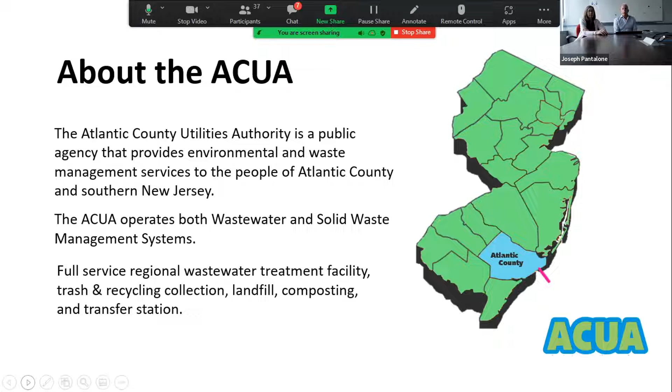ACUA operates a wastewater division and a solid waste division. We are actually filming this video from our headquarters, which is where our landfill and composting and recycling center transfer station are located.

As Sarah mentioned, that's our service demographic. We serve about 275,000 people, which is over 100,000 households and over close to 550 square miles.

Our facility is rated at 40 million gallons a day. It's considered an activated sludge treatment plant. We operate 20 regional pumping stations. In addition to that, we have shared service relationships with some of the communities that we serve. So our collection system entity services over 120 pumping stations a week. That's quite a task for about 10 individuals on that team.

We service 14 member municipalities, of which Atlantic City is our largest contributor. As Atlantic City goes, so does the rest of the county, and that's been a roller coaster ride as you follow the news and everything else, particularly after Sandy and with the competition of casino gaming across the country, and then most recently COVID. These are some of the pitfalls that Atlantic City has faced, not only Atlantic City, but others, but it seems to hit Atlantic City a little bit harder than most as the economic engine is up and down.

We treat about 27 to 30 million gallons a day, even though we're rated for 40 million gallons, and our ultimate discharge is out into the ocean, and we'll go through the treatment process in some of the other slides. That gives you just a footprint of where we are in the eastern side of the county.

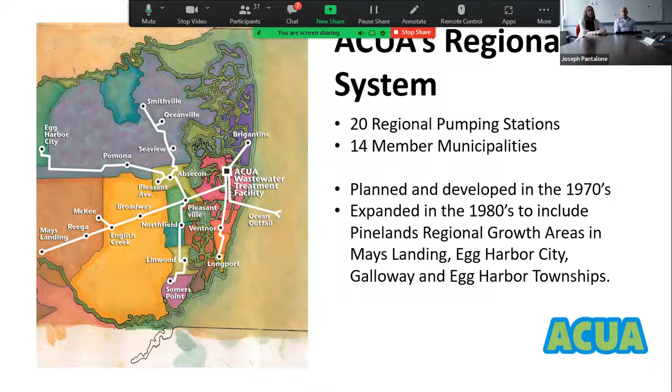I started my career where it says Mays Landing, and I was the executive director of that utilities authority. And instrumental during my time, we were decommissioning that plant and joining the ACUA network. Long story short, I ended up here at the end product.

Just again, that is the map of the entire county. And as you can see, as I pointed out, most of the area to the top of the map is predominantly rural and unserved by our network. And that one dot, that Mays Landing dot right there, that's about the extremity of our service area. And almost parallel to that is Egg Harbor City, which is the furthest we go in that area as well.

So a little bit about the wastewater treatment plant. Again, anywhere from 27 to 30 million gallons a day. Interesting enough, COVID really took a hit on Atlantic City, so it took a hit on our flows. Our flows were probably the lowest they have been since the 70s, which is quite interesting. And soon, we hope, and so does Atlantic City, to start ramping up again.

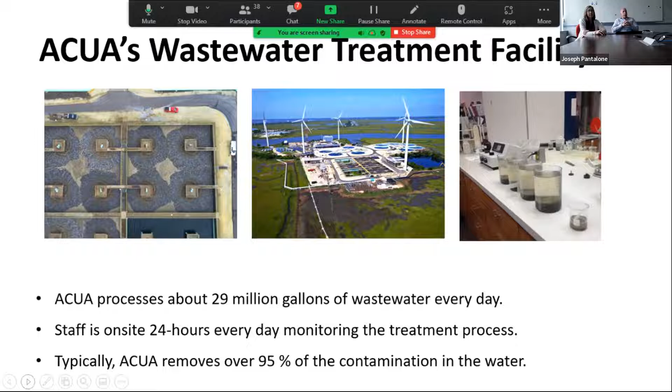We have a 24/7, 365-day operation, and our permit, because of ocean discharge, obligates us to meet 85% removal of contaminated biological process in our stream. We are generally over 95% plus in our treatment process.

So this is kind of an overview, and you're going to see various processes here as I explain them. Essentially, where I'm pointing to now is the Headworks Project or Headworks structure. There are 4 mains that come into the Headworks structure: one from Atlantic City, one from the mainland, one from Brigantine, an island to our north, and a small subdivision across the street. So 4 pipelines, varying in size up to 48 inches, come into this Headworks facility.

At the Headworks, that's where we screen all debris that comes into the facility, which you're not supposed to flush down the toilet, but you'd be surprised what we do see. One false advertisement is flushable wipes. This is my editorial comment: there is nothing flushable except for toilet paper. So if you learn anything from this lesson, please do not flush anything down the toilet except toilet paper.

So from the Headworks, where we screen out all the extraneous debris, we go into what they call primary clarifiers. We have 5 of them, as you can see. At the primary clarifiers, we're trying to scrape the solids to the bottom of those tanks, which will be conveyed to what we call our solids handling aspect of our operation.

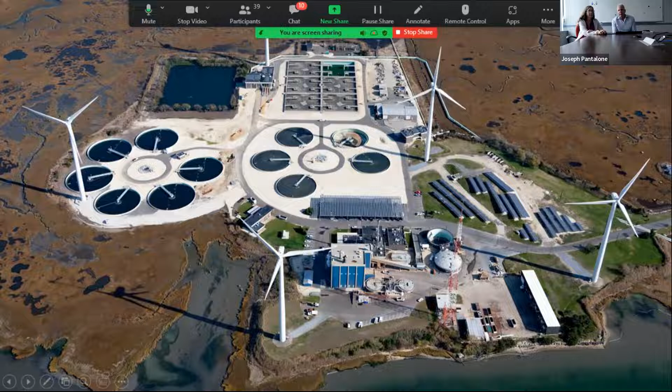Okay, so that's the overview. Next slide. What I talked about earlier is pre-Clean Water Act. You can see the red on the left graphic—that's where shellfish and bathing were prohibited because of bad water quality. Post creation of the regional facility and decommissioning of all the wastewater treatment plants that were contributors, all those dots, we became centralized.

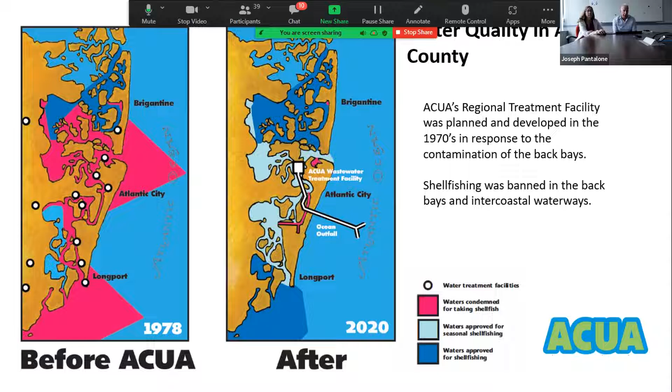You can see on the right screen, that's where our plant is, and there's no more dots, other than pumping stations now. You can see our outfall into the ocean on the Ventnor-Atlantic City border. The good news is very limited red dots, and mainly the ones that remain, the red graphic, remain because of stormwater runoff. But because of the creation of regional wastewater facilities, shellfishing has come back into fruition, as well as bathing, with no fear of beach closures.

Just to give you a little bit of before and after—this is what I like to do on the tour. You can see how it comes in and how nasty the water is, and this is what we discharge into the ocean. Our solids we incinerate, and the incinerator byproduct is ash disposal, which we bring to our sister agency, the landfill, and use as landfill cover.

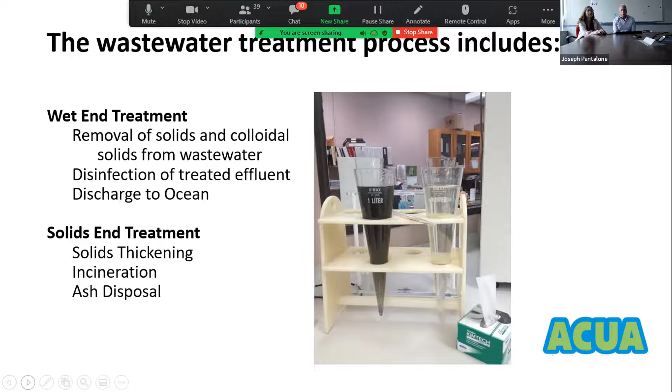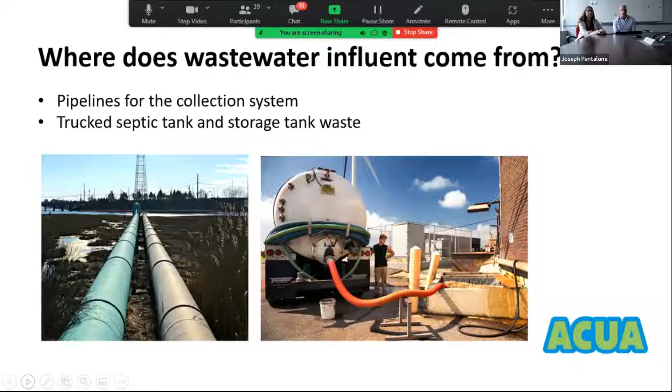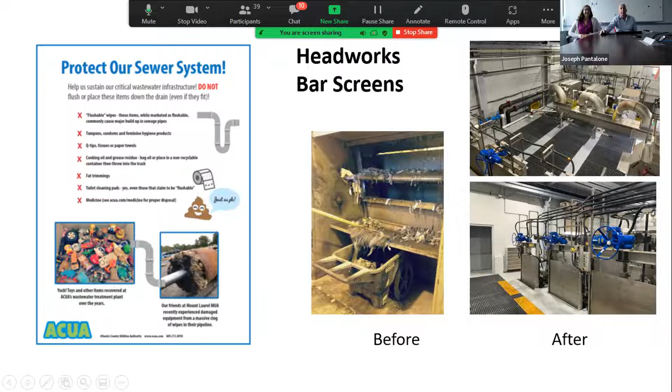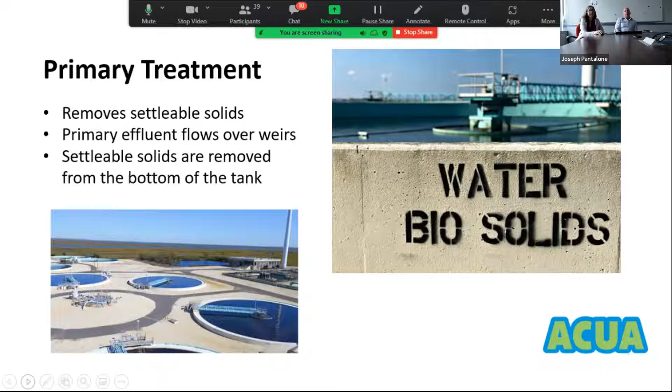So again, this is just a close-up of the overview. This is the primary settling—we're trying to settle the solids. The primary effluent goes over the weirs, and that process continues to the next slide, which is the biological process.

This is where I show the before picture to the tours that are actually live, and you can see how nasty that water is, but it's being aerated and consumed by the biological process, which is the main ingredient of how we're able to cleanse the water.

And if you want to go back, you can see it in motion. You want to go back? Sure, okay, well...

There we go. So no swimming is allowed in the aeration basins.

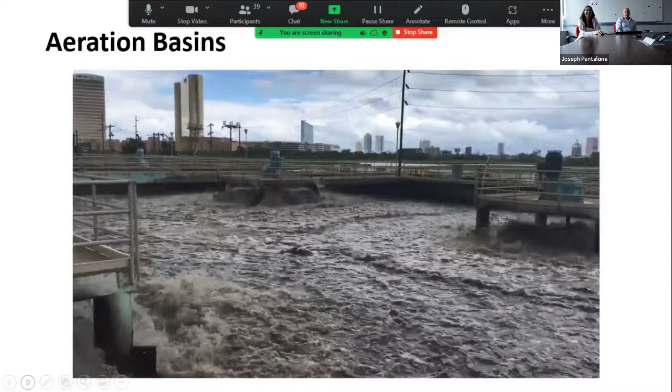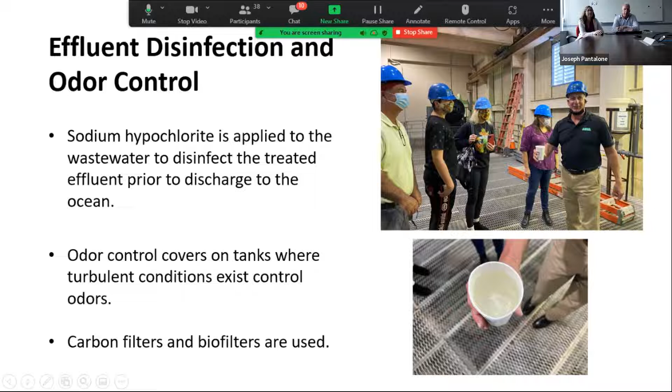Next. That's me, that's one of the slides. What we try to do is show the before and after, and I'm holding a cup there, which comes from our sampling tank before it's a sample area, or before it goes out and gets disinfected by chlorine bleach or sodium hypochlorite, which to you is essentially household bleach. That's what it looks like before it goes out to the ocean.

Once again, our treatment area, to the left bottom picture, that's the equalization basin. During storm surge, we'll bring that down manually, just pump it down so we have enough area to handle the storms. Sometimes during a storm surge, with what they call inflow into manholes, we treat up to 60 million gallons a day during a storm event.

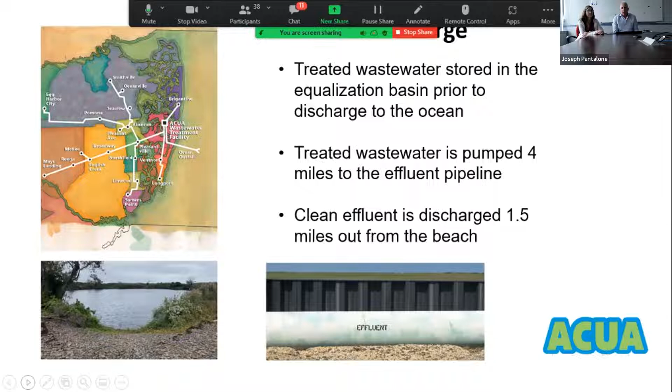Unlike several other facilities that are like us, we do not on purpose treat stormwater. We are not a combined sewer entity. We treat domestic sewer, but by the nature of storms and flooding in low-lying areas, we do get storm surge, not by design, but by default. We have an outfall that goes 1.5 miles into the ocean.

So the biosolids aspect - you can see here that truck is a Cape May vehicle, and that's a 30-yard dumpster of which they fill up to 25 yards, and they dump it at our facility where we put it in a hopper and convey it to the top of the furnace, where the ACUA insignia is up there.

Our plans are to redo all of this because we're talking about 40-year-old technology, 40-year-old life. We are under study right now and under design to change this whole matrix. We will hopefully be under bid and under construction for that in 2023, just one of the areas we'll be improving.

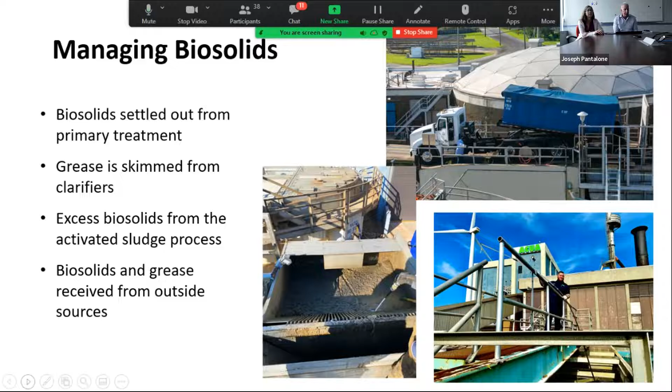Next slide. These are centrifuges. When I talked about the product going to the top of a building, these centrifuges spin about 1,500 RPMs and they dry or dewater the solids. The drier they are, the thicker they are, the better the cake, therefore the better it burns - hence less energy in the form of natural gas. That's how our incinerator is fueled.

What we are currently doing under our trial program to the right is an alternative means of drying or dewatering the cake. Unfortunately, right now the trial is not panning out too well, and by default we probably will reinvest into the centrifuge technology on the left, because it's tried and true. The advantage of the rotary presses is that they're less maintenance intensive and less energy consumptive, but unfortunately, if they don't put out the cake and the throughput, we would have to revert back to what has been known in our industry, though they'll be brand new if we decide on that technology.

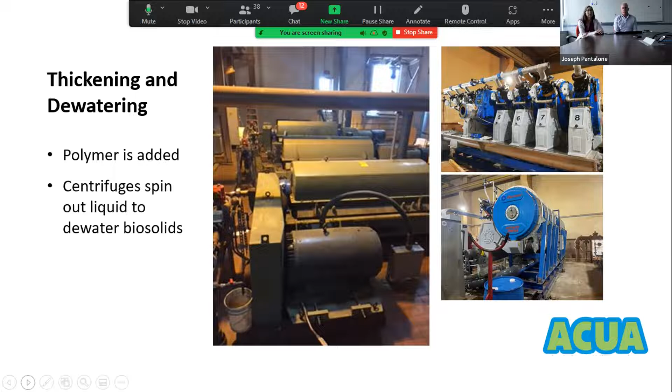Next week, we will be in a planned maintenance schedule. We take this furnace down twice annually, 2-week duration, and we do preventative maintenance. During that process, we will take all of the hardened sludge out of those hearths and get it ready for the next 6-month interval. Next slide.

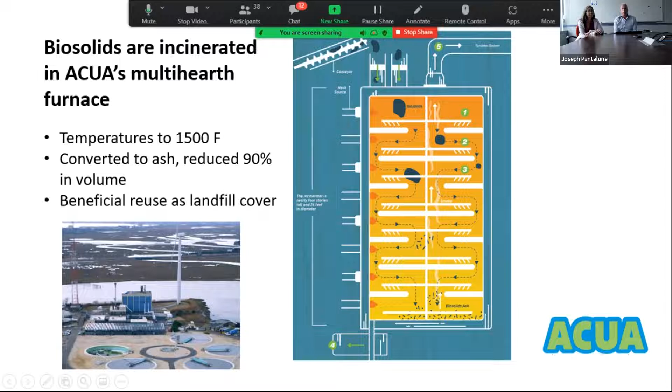Once again, that's the overview, and I'm going to hand it off to Amy, who will talk a little bit about our green energy and how we use the various other forms to facilitate our operation.

Thanks, Joe. So, hi, everyone. Just jumping in to give a little overview on our renewable energy projects. As Joe mentioned, the solar and the wind in particular. We were really so happy to be able to use renewable energy at our facility. It's benefited us in so many ways. So I just want to give you a little background as to how it got there and how it all came to be. So you probably got a sense of our operations from Joe's presentation.

It takes a lot of energy to clean and treat wastewater. And we're doing a lot of it. We're by far not the largest, but that's a lot of wastewater every day, 28 to 30 million gallons. And those aeration basins, those aerators, the impellers that are churning up the water, those are like 100 horsepower motors, each one of them, to dewater the biosolids and just to move the wastewater from place to place and to pump it all the way out to the ocean. It's very energy intensive. So that's very costly.

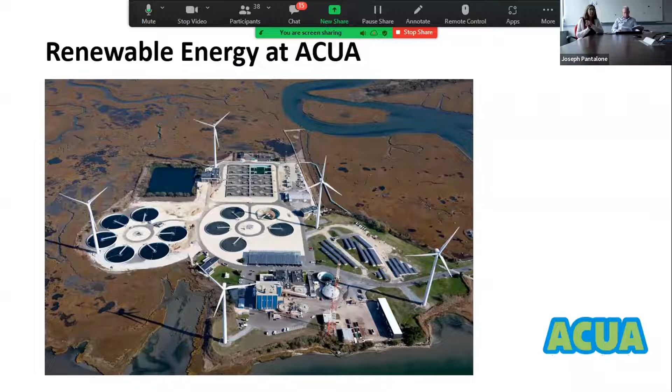So it's expensive to build a wind farm. And what we did was to partner with a private entity. So we don't actually own the wind farm. We have a partner. It was a wind developer, Community Energy, that brought together investors who formed the Jersey Atlantic wind farm. The owner now is Leeward Energy. It's actually changed hands a few times. That has not impacted our operation at all.

But the Jersey Atlantic wind farm was constructed - it wasn't a cost to us, but it did cost $12.5 million. There are 5 1.5 megawatt GE wind turbines. And altogether, there's a 7.5 megawatt production capacity. That's enough for about 2,500 homes. This provides us with about 60% of the electricity for our plant. It's not 100% because it's not always windy.

And when it's not windy, we're needing to pull power from the grid. We use about 2.3 or 2.5 megawatts of power. So on a windy day, when we are at full production capacity with the wind farm, we are making more wind power, more electricity than we can use in our facility. So the wind farm owners are able to sell that back to the grid, and that's a bonus for them.

How it benefits us is that we have a 20-year agreement with the wind farm owner. And that's a power purchase agreement, and we get our power at a really low rate. It's less than 8 cents a kilowatt hour, so it's about half price. So you can see the savings for us are really significant, not only in the electricity that we don't need to purchase, but there's also a little money that comes to us from the lease revenue. So we get a little rent money from the spots where the turbines sit.

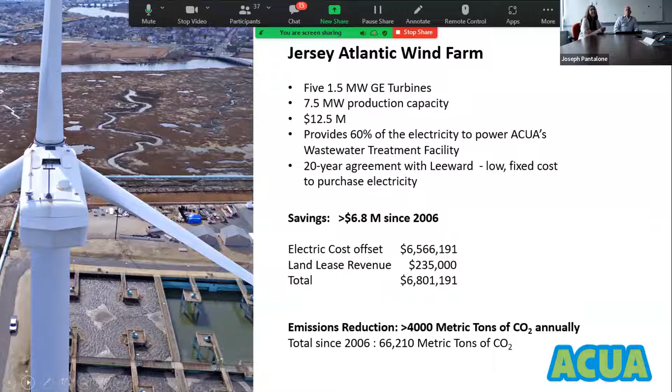We also have solar power at the ACUA. You could see some of our panels from the overview. It's a 500 kilowatt project, 2,700 solar panels. They're on the ground, on rooftops, and there's a parking canopy, which was the first one in the state, or at least in South Jersey.

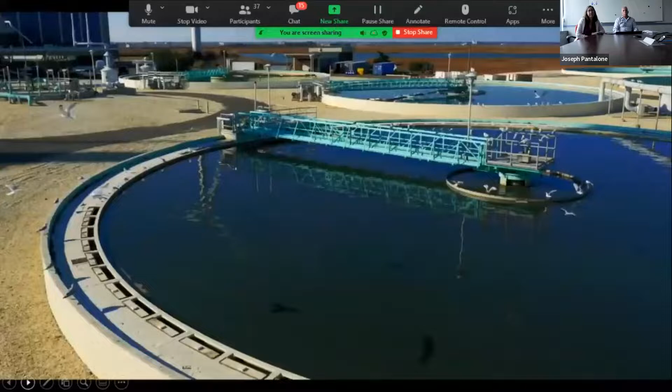The Jersey Atlantic Wind Farm is New Jersey's first commercial wind farm and is owned by Leeward Energy. It's located at the ACUA's wastewater treatment plant in Atlantic City, New Jersey. Wastewater is water that comes from drains in your house—sinks, showers, dishwashers, washing machines, and toilets. We treat about 29 million gallons of wastewater each day, but can handle up to 40 million gallons. Here, there are 5 wind turbines, and together they can generate up to 7.5 megawatts of electricity.

That's about enough power for 2,600 homes, which is great for the environment and significantly reduces electricity costs too. The column is 262 feet, the blades each 120 feet, and at its tallest point, when the blade is straight up, it's 380 feet tall.

The nacelle is about the size of a small school bus and has large gears inside. On top of that sits the anemometer, a weather station that takes a constant reading of the weather conditions, wind speed and direction. That information is instantly sent to a computer, which adjusts the wind turbine's direction and blade pitch.

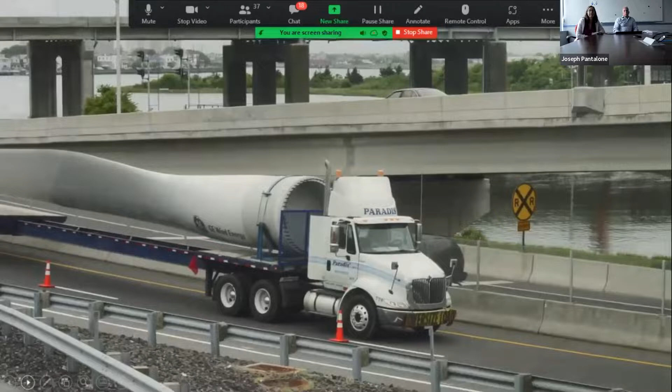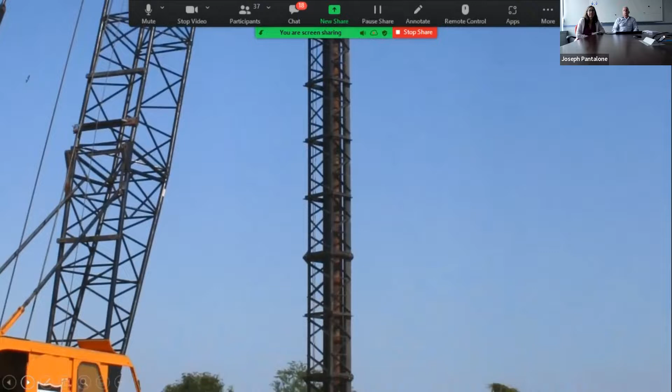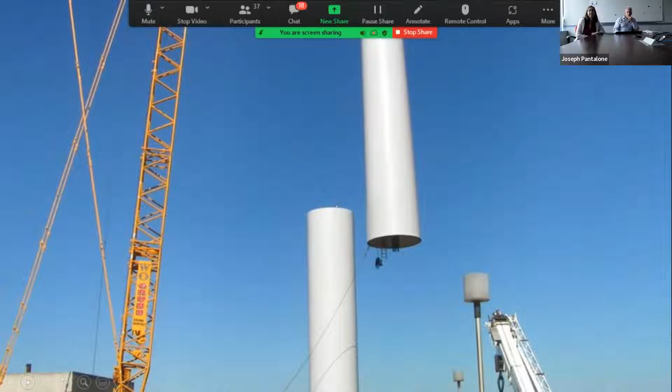The turbine parts were manufactured by General Electric and delivered to ACUA, then assembled on site. There is also a foundation about 75 feet below ground, made of concrete and rebar. There are 8 enormous parts connected together to make each turbine. Each turbine was constructed within 1 to 3 days, and the whole project was completed in December of 2005.

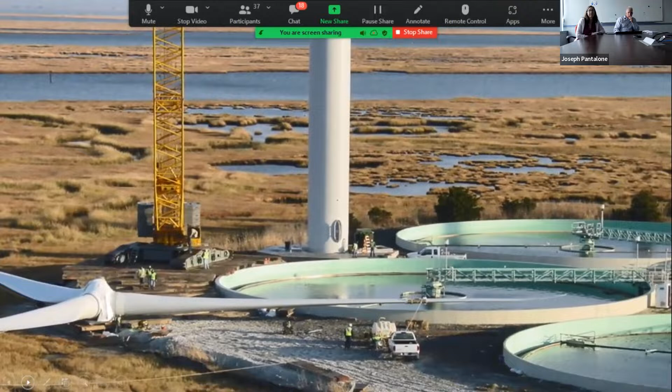They begin generating electricity when wind speeds reach 7 to 8 miles per hour. Wind turbines receive regular maintenance twice each year, or as needed. First, the turbine is powered off. Then workers open a door at the base, attach their equipment to a hoist, and climb a ladder up to the top, with a few platforms located along the way.

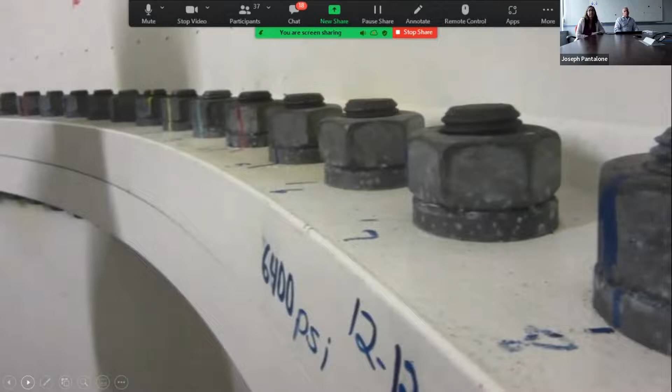Once inside the nacelle, workers can open a hatch to the roof and climb out. Don't worry, they always have a safety harness attached. Routine maintenance includes climbing inside of the nose cone too. Believe it or not, the whole structure actually sways back and forth in the wind—that's by design.

Thousands of curious visitors come by each year to learn more about wind turbines, how they operate, and why they're here. ACUA hosts open house tours each summer, inviting locals and Jersey Shore vacationers to stop in and learn more. For more information about the Jersey Atlantic Wind Farm and ACUA's open house tours, please visit us online.

So it is really something to see, and I hope that you'll join us there. I just wanted to mention one other thing for our on-site wastewater facility.

I mentioned that we only get 60% of our power from wind. If we had more battery power, we could hold on to energy for when we needed it, for when it's not windy. We do have a battery storage project at the wastewater treatment facility, which we were able to do in partnership with Viridity Energy and a generous grant from the New Jersey BPU. This is a 1 megawatt lithium ion battery in a containerized unit.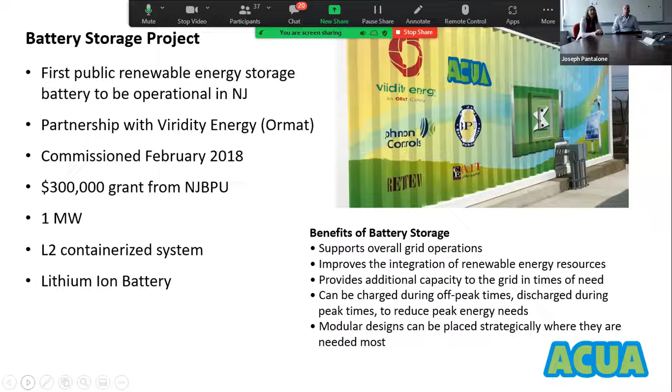We also have electric vehicle charging stations at our wastewater facility, and we have lots of plans for the future, both at wastewater and at our solid waste facility. We will be installing solar panels on our landfill here in Egg Harbor Township as part of a community solar project, providing electricity for neighbors in Pleasantville, the housing authority.

We are looking into green hydrogen, using renewable energy to create hydrogen, which can be used as a fuel. Joe will probably talk about wastewater reuse a little bit, but another project happening at our solid waste facility is the landfill gas that's collected—we're working now to clean it up so it's pipeline quality, as they call it.

We'll use that to fuel our collection vehicles and all our equipment. We've been converting our fleet to compressed natural gas over the past years, and being able to actually use gas that we take from the landfill, and prevent it from going out into the atmosphere, is pretty exciting. So Joe, I'll pass it back to you.

I don't know if you want to say anything about wastewater reuse. Real quick, before I say anything, I wanted to make sure you all knew that Amy was at the top of the windmill. Yeah, she's great, braver than I am—I got to tell you that right now. And they had a wonderful time. Yes, going through that. If you come for a tour, I'm afraid we can't take you up to the top. And I was happy about that.

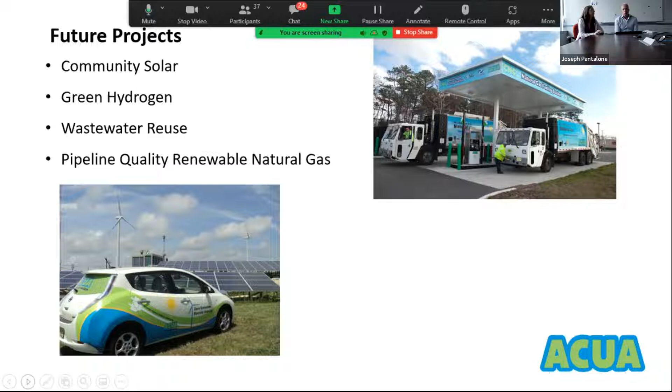The good point about the Federal Clean Water Act, as we showed on earlier slides, was it cleaned up immensely what was contaminated waterways. The downside is that centralization did not replenish, or did not have a plan to bring the water back, which is an extremely precious commodity. So we continue to try to advocate to the state of New Jersey, who has in their water master plan a section on water reuse, but it has not been very active. But we will not give up. So that's my little sales pitch on water reuse.

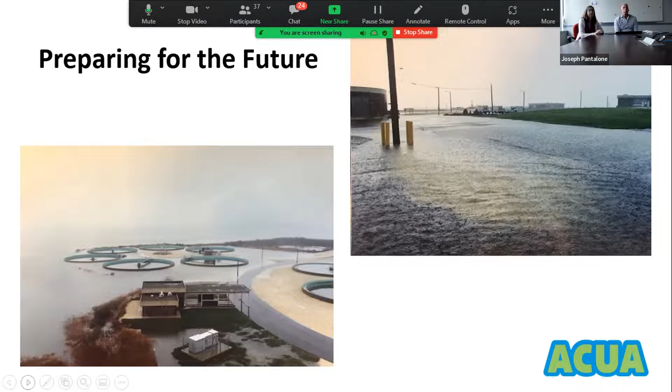A little blurb about preparing for the future. You could see at times the bay does come into the wastewater treatment facility, and this was not even Sandy—this was several years before Sandy. You could see that we are in low-lying areas, as most wastewater treatment plants are. So after Sandy, we were the beneficiaries of Sandy resiliency funds, and most notably, we were able to improve our reserve power, our emergency power.

We have brand new, or relatively brand new, emergency power throughout the island. But what was most noteworthy about Sandy was the stormwater surge. We in central or southern New Jersey were not as prone to the hit that the northern part of the state took, particularly Passaic Valley Sewerage Commission, one of the largest wastewater treatment facilities in the nation. They were inundated and were delivering raw sewage to the receiving waters. We were not in that much peril, thank God.

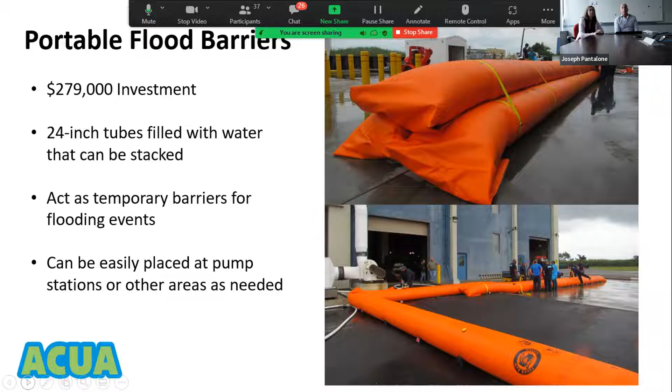Other features of the Sandy Resiliency Fund allowed us to erect these portable barriers. This is just a demonstration—again, we haven't had to use those, thank God, but they will be available because they're portable, around low-lying areas and most strategic pumping stations. That's again something that was part of the Sandy Resiliency funding.

Just for the future, a little blurb on asset management: the biggest fear you have is a broken force main. We've experienced several of those, and unfortunately, unlike water facilities, you don't build redundant lines. It's just impossible and economically infeasible to run parallel lines throughout your system. So we have a strategic plan to investigate our facilities annually, using different technologies.

And that is it. Again, Amy and I would like to thank you for giving us the opportunity to share who we are and what we do. We're very proud of what we do, and we think we're extremely innovative. By and large, this is a great place to work, and our coworkers are a wonderful and very dedicated staff. So with that, we could open it up to questions and answers if anybody has any.

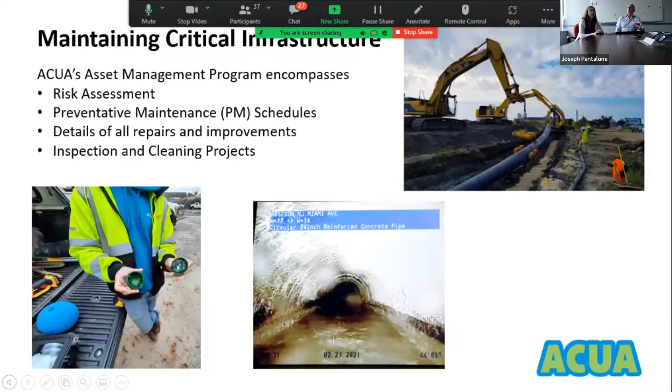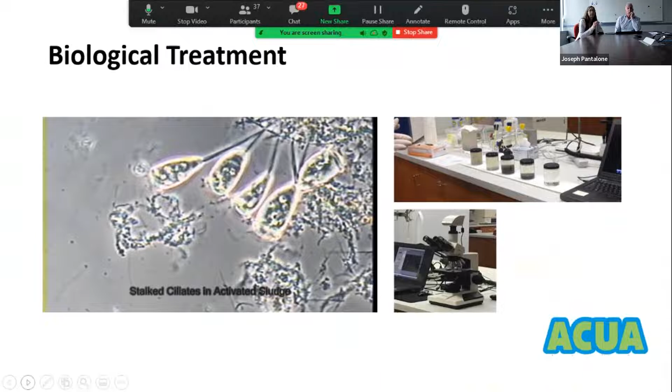Well, there's all kinds, but mostly filamentous and protozoa. I'm not the biologist here, but they're the 2 prominent ones. Filamentous is the balancing act—you don't want too many of that creature in there. Now, how to measure that? Our lab staff is taking samples throughout the day, so we have a count of what the biological process is in the aeration basin. From the secondary clarifiers, we feed microorganisms into the aeration basin if we need more of the process. If there's too many, that aspect of treatment is called wasting—we relieve some of the solids out of the bottom of the aeration tank and bring it back to the head of the plant. So that's the finesse part, and those counts are taken throughout the day, and operators try to balance that with either introducing more bugs into the aeration basin or wasting more. That's the daily finesse, if you will—as much an art as it is a science, and those who've been doing this for years kind of have a feel for it. Hopefully that answered your question.

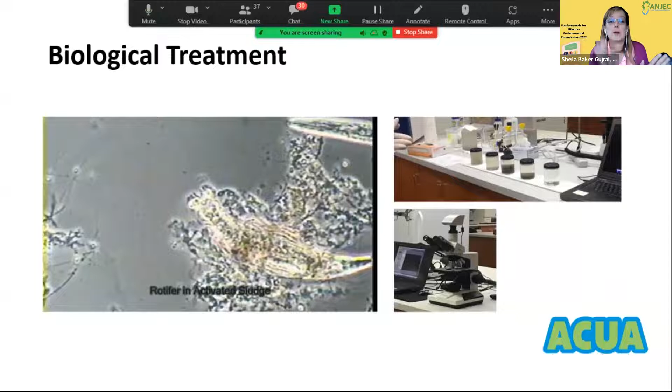That was because of sheer elevations on our facility. The seawall is where our biggest concerns are. Where the seawall is not located, that is the higher elevation, and we are above the level we would have had without the seawall.

Okay, interesting, thank you. The next question we have is: if 5 towers provide 60% of energy used, is Leeward thinking about adding several more? The answer is no, but we maxed out with 5. If they could have put more here, they would have, just because of the constraints. We are an island on an island, if you will.

What I wanted to point out, and I forgot to do this, is this area here is the remnants of the old Atlantic City Sewerage Company plant. Essentially the footprint of this island was cut off right here. All of this area is fill, predominantly from demolished hotels prior to the casino industry. I kid that there may be some dead bodies in there somewhere, but I don't know.

But the fact of the matter is, there would have been more turbines if they could have put more. Spacing between them is important, and just the geographic footprint of our island would not have allowed for any more. But they would have.